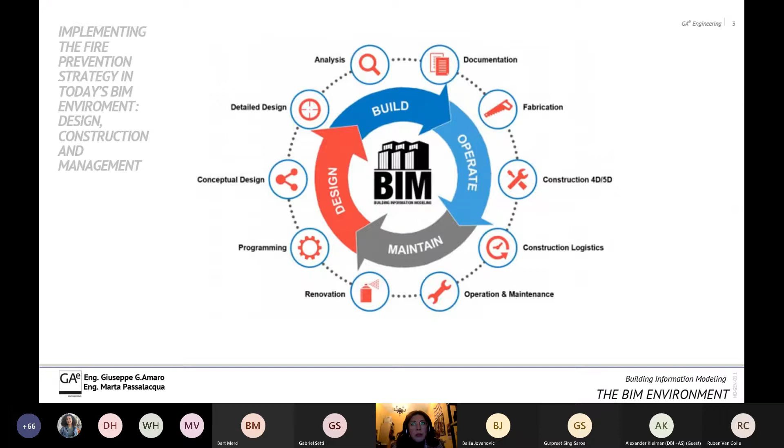BIM. BIM is an acronym of Building Information Modeling, and it is defined by NIBS as the digital representation of physical and functional characteristics of an object. This is an operating methodology based on the creation of a single digital model in which all information relating to the building is centralized, leading from design to maintenance.

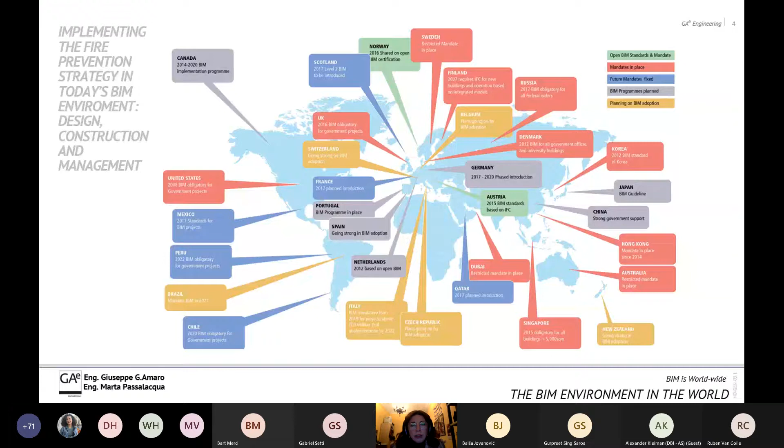Development of standards and adoption of BIM has progressed at different speeds in different countries. The introduction and adoption of this methodology has evolved rapidly in Italy over the last 10 years, beginning in the context of design and construction, and now found also in the administrative review and approval of projects.

In fact, in 2014, the new directive of the EU pushes member states to encourage, specify, or impose the BIM methodology as a reference standard for all publicly funded projects. In Italy, the mandatory nature of BIM took place gradually with the application of Ministerial Decree 560 in 2017. In Italy, we call it the BIM Decree.

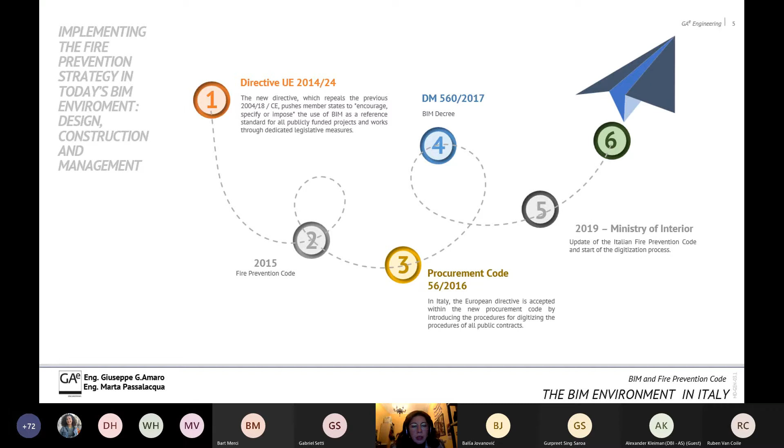On the other hand, the Italian Fire Prevention Code was published in 2015 in first revision, and then published in second revision in 2019. Before the Italian Fire Prevention Code, we used the prescriptive method.

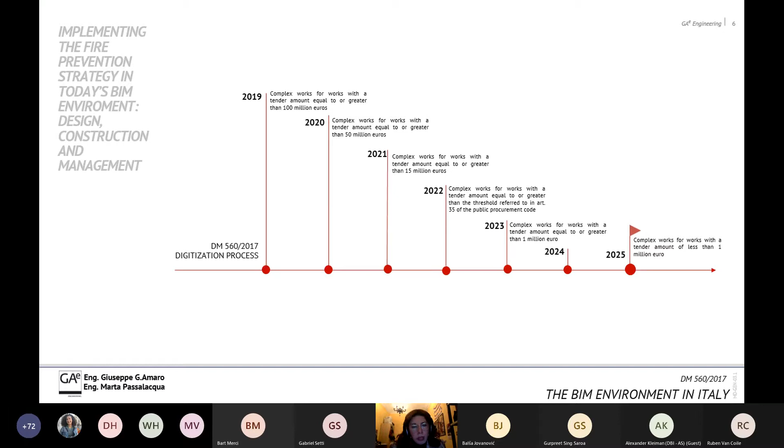The BIM methodology places its heart in the 'I' of information. In fact, the set of information and geometric characteristics make a BIM object.

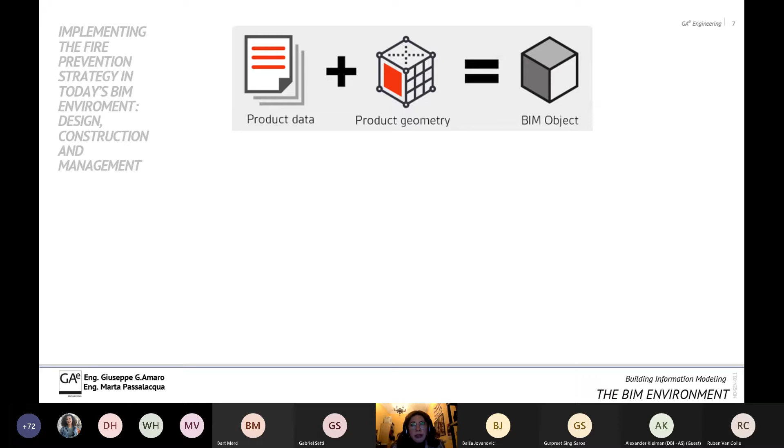In the BIM process, information is already collected from the design stage, and it is very important to have a uniqueness of data, and for that it is necessary to have open format files. In BIM language, this translates to IFC.

IFC is an acronym for Industry Foundation Classes. You can imagine this format like PDF. For example, if I write a text document and I use Microsoft Word, and you usually use LaTeX, you can read my text file if I export it as a PDF, so you can read my file.

The same thing happens in BIM. If I make a model with, for example, Autodesk Revit, and you use, for example, ArchiCAD, you can read my model with this open format file. It is created to facilitate interoperability between the various operators.

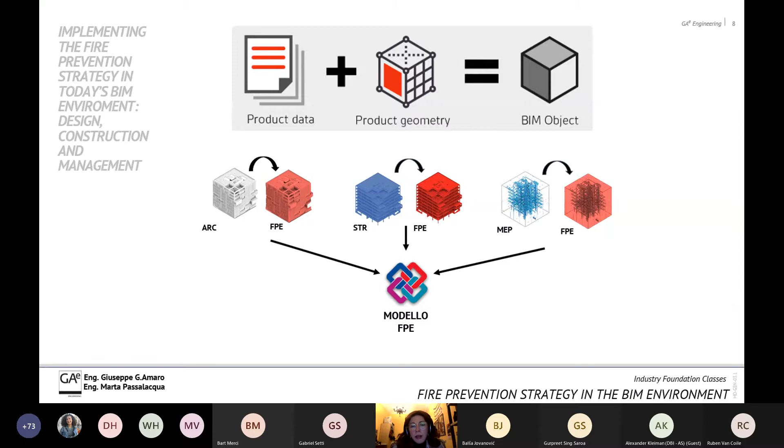In fact, normally architectural and structural teams use different software. For example, the architectural team uses Autodesk Revit, and the structural team uses Tekla. With an IFC file, everyone can read the models. I'll show you the difference between

the traditional method with CAD and the digital method with BIM. The first difference is about documentation. In the first case, usually we have a lot of paper documentation or digital documentation, but we have a lot of graphic sheets or technical reports.

In BIM, we have a single digital model, but it isn't really single - you have a federated model with whole models from every design team. For example, maybe you could have 2 models from architectural, 1 model from structural, and 3 models from mechanical, electrical, and plumbing teams, and another model from the fire safety team.

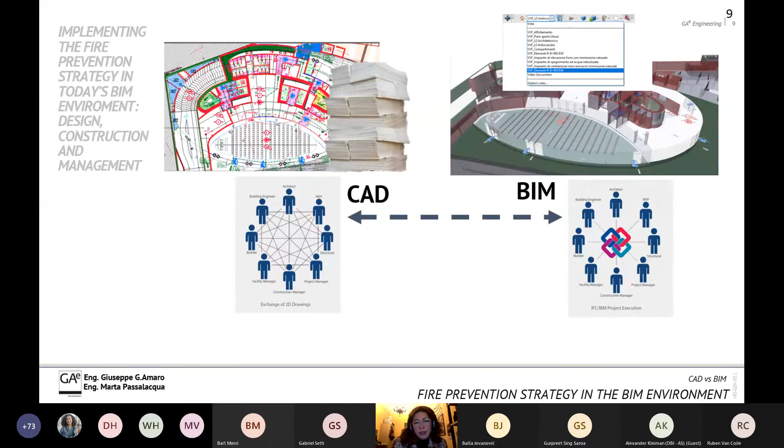The most important difference is about collaboration. In the first case, in fact, the collaboration is very chaotic. In the second case, the collaboration is a very important aspect of BIM.

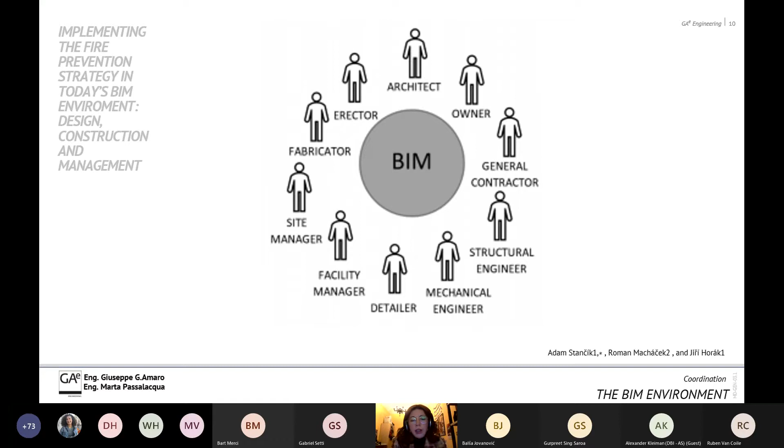In this slide, I show you an image taken from an article using a BIM model for fire emergency evacuation plan. As you can see, we have many professional figures like architect, general contractor, structural engineer, mechanical engineer, facility manager, etc. But one is missing - this missing figure is the fire engineer, and this figure is very important because it plays a transversal role through all disciplines in all phases of the project.

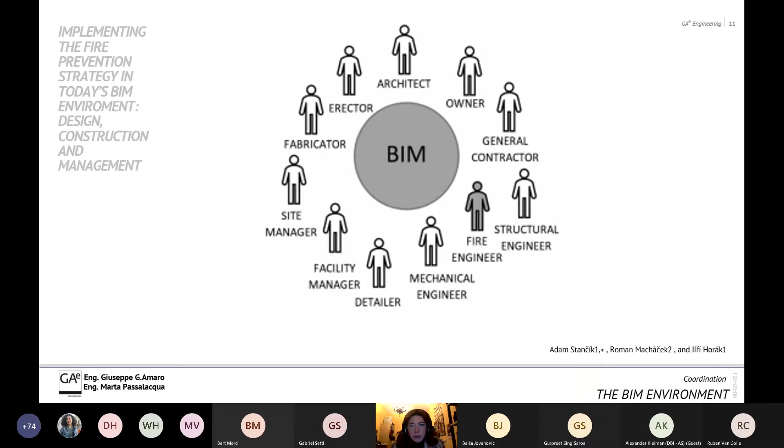I talk about the Italian Fire Prevention Code. It is divided into 4 parts. The first part is section G, general information. In this part you can find terms, definitions, fire safety design, and a segment of risk profiles for activities.

In section S, fire safety strategy, you can find all the measures used to design a fire safety strategy, like reaction to fire, fire resistance, compartmentation, evacuation, etc.

Section V is vertical technical rules. This section is for some subject activities. In Italy, we have 9 vertical technical rules, like offices, parking, schools, shopping activities.

And the last section is section M. In this section, you can find the methodology for fire safety engineering with 5 scenarios. Maybe I passed in the chat the URL of the English version of the Italian Fire Prevention Code.

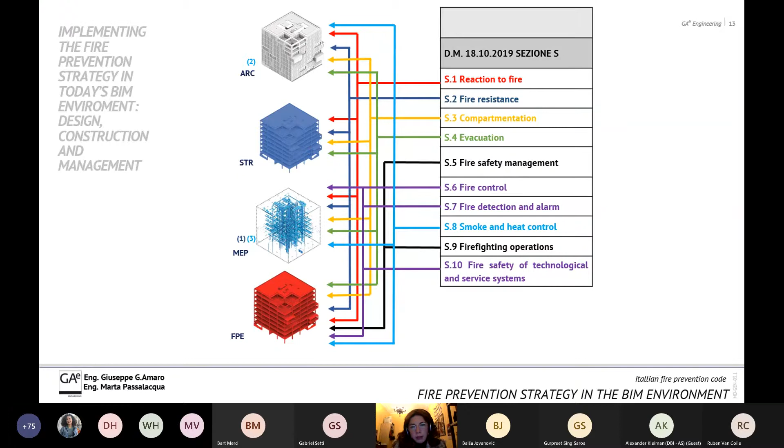There are many projects that we involved in BIM. For example, we used BIM to manage big events like Carnival of Venice or events in Turin. We used BIM to manage spaces in Roma Termini Station or manage the National Cinema Museum in Turin. For others, we developed the fire prevention model.

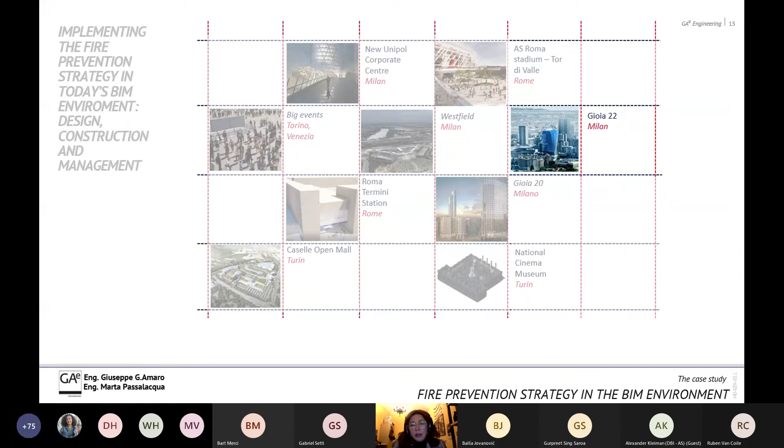The project selected for this presentation is Gioia 22 in Milan. It is a new high rise in Porta Nuova Garibaldi. The building is comprised of 22 levels above grade dedicated primarily to offices, and four underground parking levels that include technical and storage rooms. At the ground floor, there are commercial spaces that are completely independent from the office activities.

In the first phase, the design phase, we made 2 models. The first model is a masses model. We can say that model is a section G model.

Every subject activity was modeled by mass. In this slide, you can see the subject activities present, like the 4 underground parking levels, the commercial spaces, the office levels, and technical spaces at levels 23 and 24.

In the project information sheet, in the proprietary software, in this case Autodesk Revit, you can find the same parameters like building name, the author, activity manager, fire safety professional, main fire use. 73C in Italy are the offices, and ancillary fire use are the other subject activities.

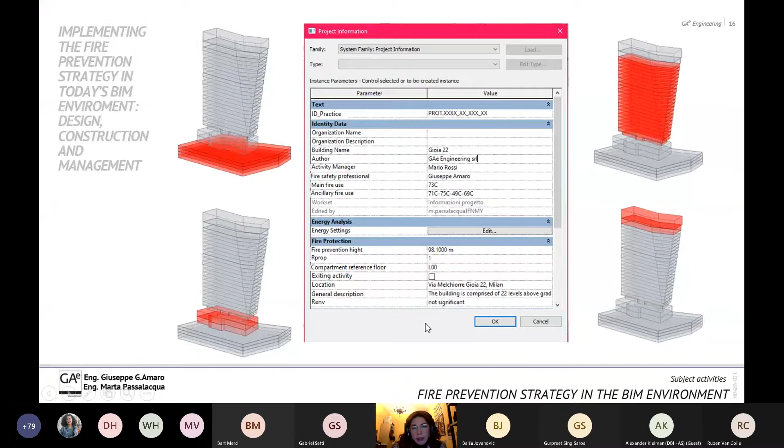We used computational design in Autodesk. We used Dynamo, and using this script to insert the parameters into the model. In this case, we use the script to insert life risk and delta alpha and delta occupant. These two parameters are necessary to calculate life risk.

Another script is to insert in the model, in this case into the subject activities, so in the masses, to insert all the measures about fire safety strategy, and we also insert the parameter about activities if the subject activity is main fire use. In this case, it's true because it is an office.

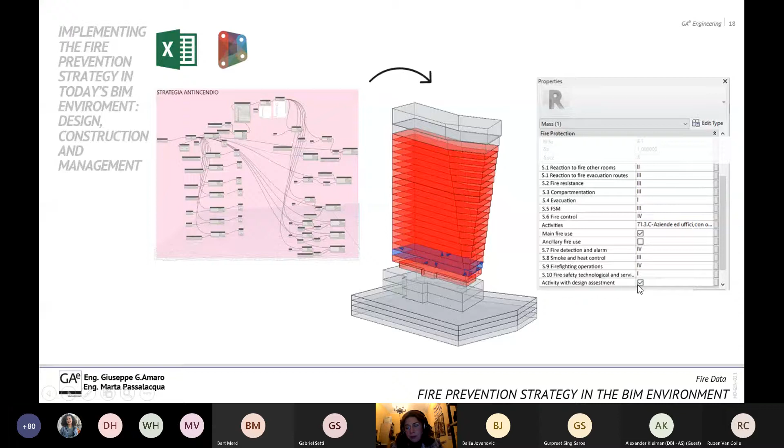And if the subject activity is an activity with design assessment, in this case it's true. The second model we made is a spaces and zone model. We can say that this model is a section S model, and the following slides refer to a typical floor of the building, in this case an office floor.

For fire resistance, we have two models to insert the parameters. In the design phase, in our model, the fire prevention model, we put the parameters into the zone, because the zone represents a fire compartment. In the architectural model or structural model, the parameters are inserted into walls and doors or columns.

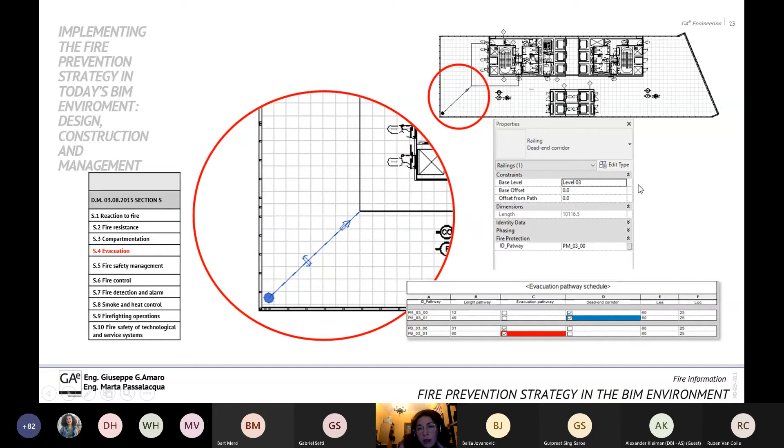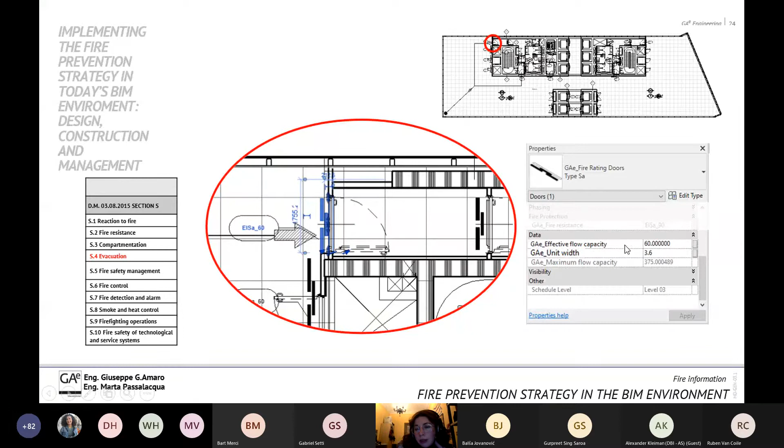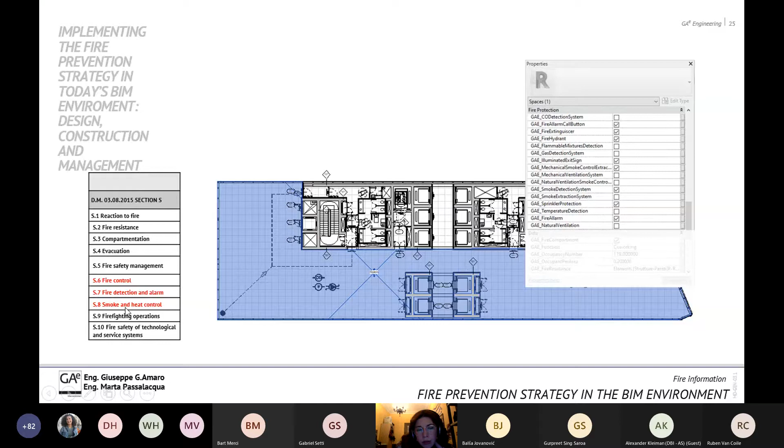In the symbol that we modeled of the doors, you can find other parameters related to Exodus. And in this slide, you can see the parameters associated to the spaces about fire control, fire detection and alarm, and smoke and heat control.

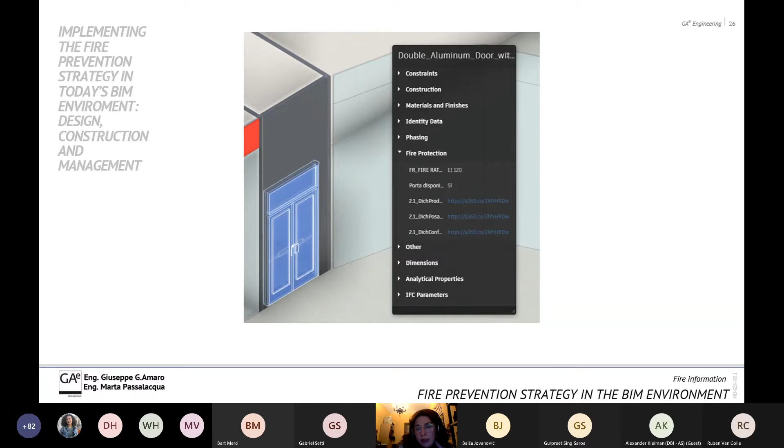The BIM model was also used to collect all documents to apply for the occupancy permit. In this slide, you can see the model inside the CDE. In this case, it is BIM 360. And if you select a door, for example, you can find the parameters.

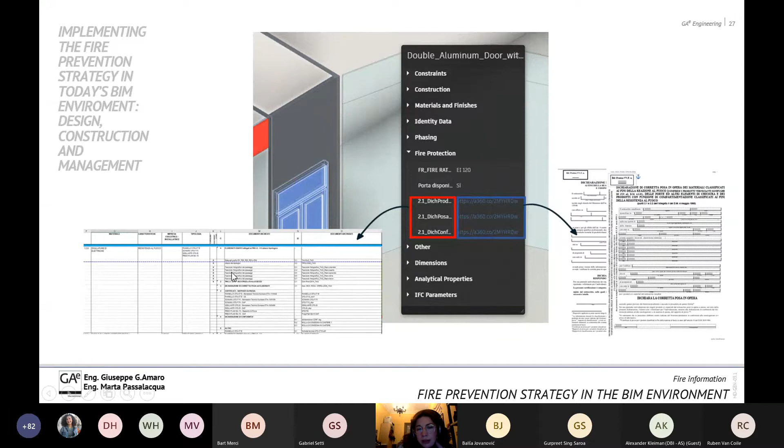And if you select the value of the parameters, you can open the documents. This is our Excel sheet that we use for the management of all documents.

Rapidly, I talk about the IFC model. When you export from Revit an IFC model, it is very necessary to define the property sets.

To manage this model, especially for fire administrative purposes, we decided to define property sets like VVF underscore activities or VVF underscore parties involved. So I show you three examples for three property sets.

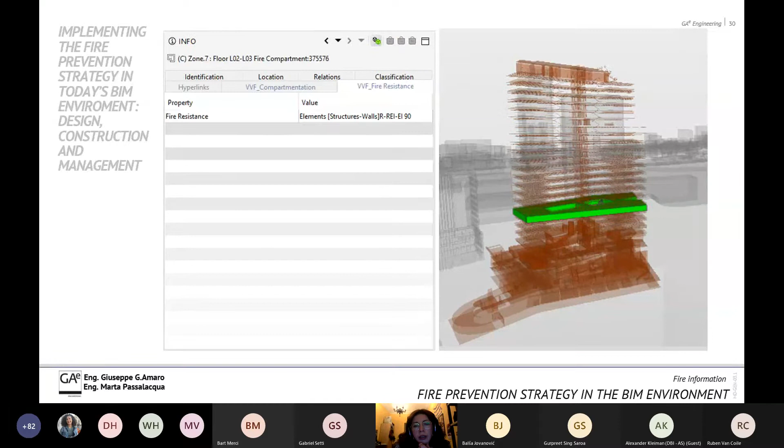The first one is VVF underscore reaction to fire, if you select a space, or fire resistance, if you select a zone, and fire compartment if you select a zone. Four examples, sorry. And the last one is VVF underscore fire control.

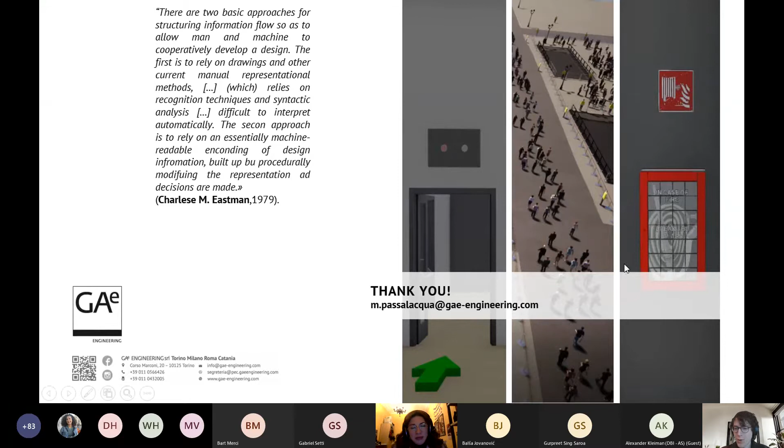The question was asking if it is foreseen that this directive, 2014-24, will become a regulation in the near future. Yes, in Europe. In Italy, we have a ministerial decree 560. The directive is for all states of Europe. Every state, I imagine, has a specific technical decree.

Okay. And I assume that Daniel O'Dowd wants to ask a question. In that case, Daniel, I invite you to unmute your microphone.

Thank you. Okay, so it's kind of a two-part question. The first part is, do you have to make these models yourself? And the second part is, if not, how is it that you got this information into the other discipline models? Like, how did you get the information into the architecture model and the structure model, for example?

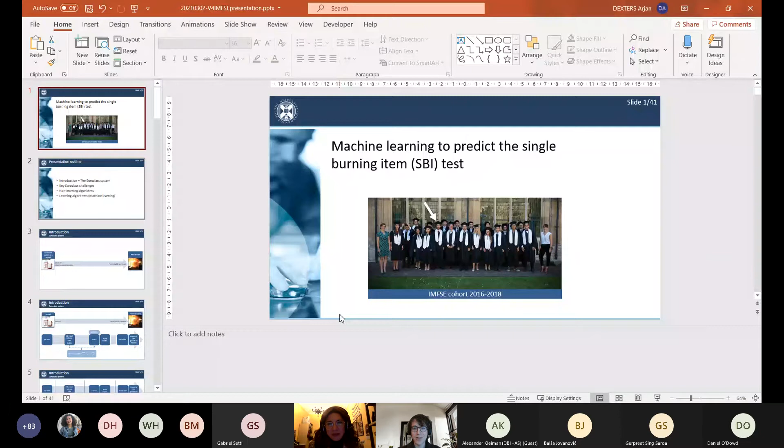Bye. Okay. Hi there, everyone. Can you hear and see me? Yes. All right. So I am Arjan. I graduated from IMFSE in 2018, and currently I'm doing a PhD at the University of Edinburgh. Today I'm going to talk a bit about machine learning and how to use machine learning to predict the single burning item test.

The presentation outline will first give some introduction about the Euroclass system, and we'll outline some key Euroclass challenges and look at how non-learning algorithms tackle these challenges, and then we'll see how learning algorithms tackle these challenges.

So first things first, what is the Euroclass system? The Euroclass system is actually a model that predicts the fire behavior of construction products in the real world. The Euroclass system is based on the SBI test and some other small-scale tests. And the real-world scenario to be modeled is fire growth in a room.

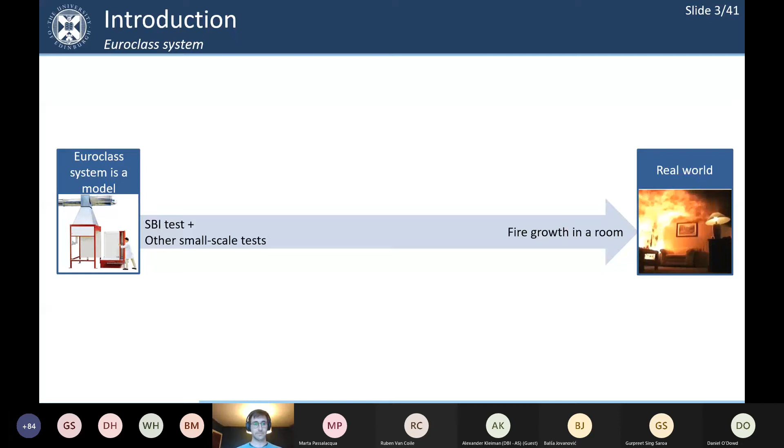Because the SBI test is the most important test, the remainder of the presentation will focus on the SBI test and not on the small-scale test. So let's see how this works to go from the SBI test to the real-world scenario.

So at first, the SBI test is done, and then from the SBI test, we get the SBI heat release rate. The SBI heat release rate can then be converted into a so-called FIGRA value, and to do that, you use the equation at the bottom of the screen.

The equation actually states that the heat release rate value at every time step measured in the SBI test, you divide it by the time that it occurs. And the 1000 is there to go from kilowatts to watts.

Once you have transferred your heat release rate curve to a FIGRA curve, you can then track the maximum FIGRA value, which you can find in the Euroclass table. And then once you have the Euroclass, you can also find the predicted contribution to fire growth in a room.

Now, I should say here that the FIGRA is not the only classification parameter. There is also the total heat release rate. But for the data I'm using, the total heat release rate didn't pose any other boundaries than the FIGRA, so the remainder of the presentation will be directed at the FIGRA value.

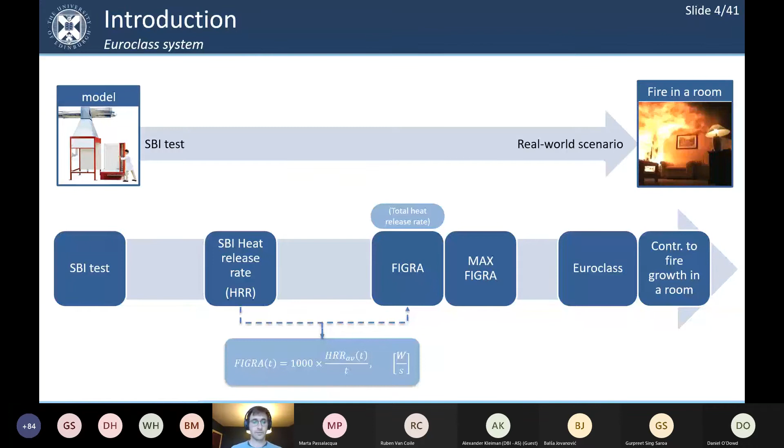A bit more visual, it looks like this. So on the left-hand side, we have the SBI test in action. Then we get the heat release rate curve. The heat release rate curve is transformed to a FIGRA curve. For this material here, we can see that the maximum FIGRA is 450 watts per second.

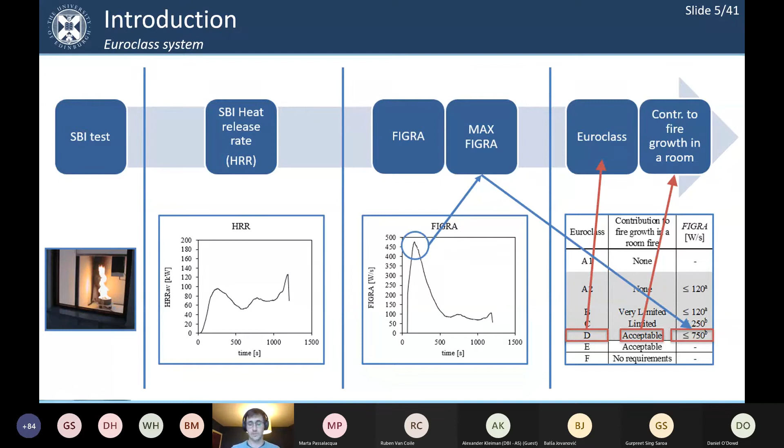So then we can go to the table. We can see that this value falls between 750 and 250, so that's Euroclass D. And then Euroclass D signifies a predicted contribution to fire growth in a room, which is acceptable. So there are a few challenges to this system, and let's look at them now.

The first challenge is the physical size of the SBI test. The SBI test is much bigger than some bench scale tests like the cone calorimeter. The cone calorimeter, for example, needs a sample with an exposed area of 0.00884 square meters, whereas the SBI test needs a sample with an exposed area of 2.24 square meters. So approximately the sample size in the SBI test is 200 times bigger than the sample size in the cone calorimeter test, and this makes the SBI test relatively time consuming and expensive.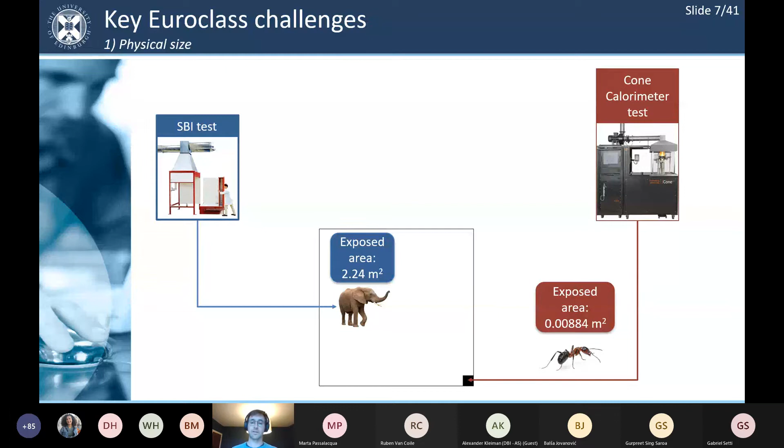The second challenge is that the Euroclass system often neglects the second half of the test. So on the left-hand side, we have a graph which shows the heat release rate for MDF. It can be seen that the heat release rate at 500 seconds is 60 kilowatts. At 1000 seconds, the heat release rate is approximately 120 kilowatts, so 2 times bigger than at 500 seconds.

But if we then look at the FIGRA graph for the same material, we see that the FIGRA at 500 and 1000 seconds is the same. This is because the heat release rate gets divided by the time, and thus the farther the test advances, the less significant heat release rate values become for the FIGRA.

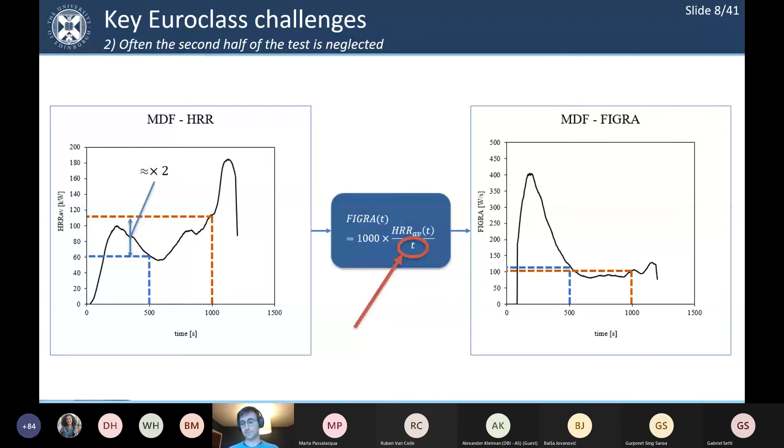The third challenge is experimental variation. So the top 2 graphs show the heat release rate and the FIGRA on MDF for 2 different SBI tests. On the FIGRA graph, it can be seen that there are 2 different maximum FIGRA values for each test, but for MDF it doesn't really matter because both of them fall within the class limits for Euroclass D.

It gets more interesting when we look at, for instance, phenolic foam. For phenolic foam, the 2 SBI tests result in maximum FIGRA values that each result in a different Euroclass. So one test is classified as Euroclass C, and the other test is classified as Euroclass A2 to B.

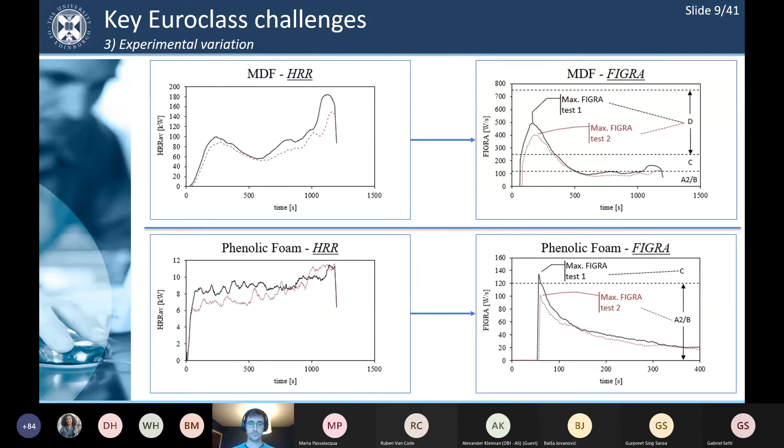The spread becomes more visible the more tests we do. The graph here shows the experimental heat release rate of 45 different SBI tests on medium density fiberboard. It can be seen that the gap between the 95th percentile lines for the first heat release rate peak is 60 kilowatts, and for the second heat release rate peak is 120 kilowatts.

I should note here that it's not the experimental variability itself that is a problem, because that's inherent to fire testing. The issue is more how we communicate the variability to the end user, or the question that needs to be asked is whether it makes sense to grant one class to a material that shows a large experimental variation.

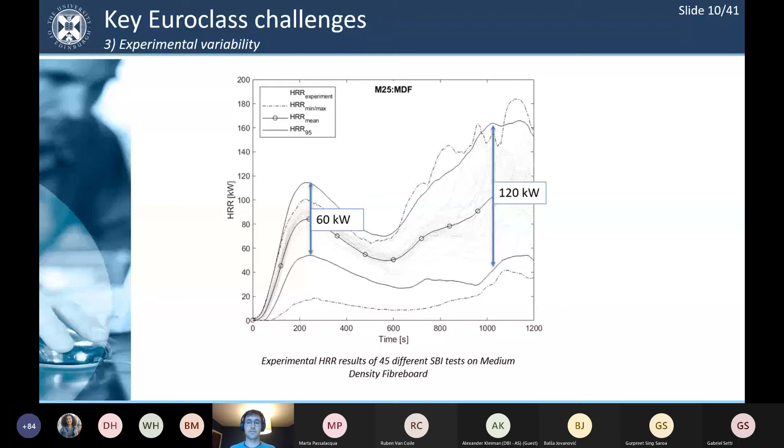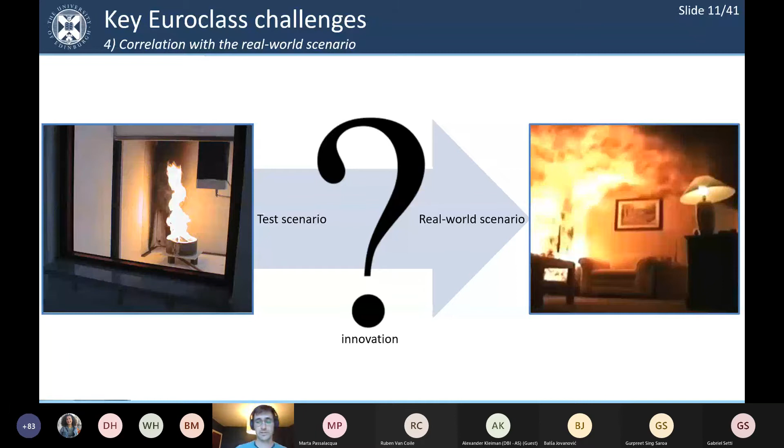The fourth challenge is whether the correlation with the real-world scenario is correct. That is especially relevant for any innovative materials marketed after 2002, when the SBI test became the backbone of the Euroclass system. So why are these challenges important?

Why do these challenges matter to us? The physical size of the SBI test makes it inefficient for product development, and this is especially relevant for the product developer. The fact that the SBI test often neglects the second half of the heat release rate data...

...that there is experimental variation that can result in multiple Euro classes for one material, and that we are not sure whether the SBI test correlates to fire growth in a room as outlined, means that a Euro class on its own does not give the necessary information to make a satisfactory fire safety design. This is especially relevant for the fire safety engineer.

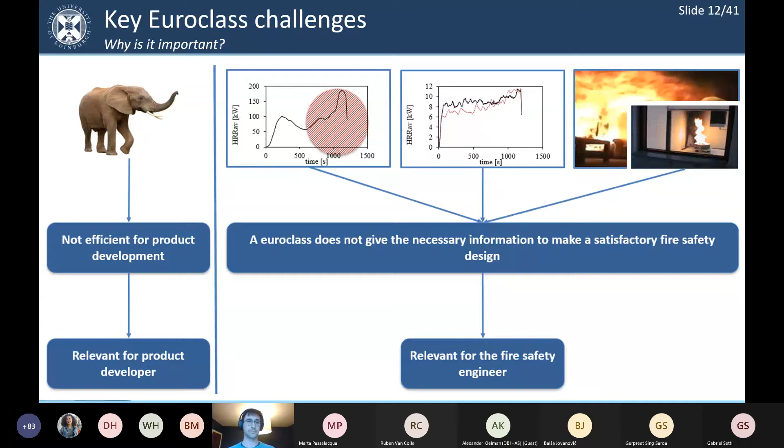A possible solution for the product developer is to make a screening algorithm based on small-scale tests. That way, the product developer can test product changes using the screening algorithm. Once the screening algorithm predicts the outcome he wants, he can go on to do the SBI test as validation. The solution for the fire safety designer is a more detailed ranking system.

The ranking system proposed is a probabilistic ranking system. So we're not going to give one Euro class for a material, but instead state the probability of each Euro class for that material. If the screening algorithm can make these probabilistic predictions, the output can be used both by the product developer and as input to the new ranking system. So what will the output of such a screening algorithm look like?

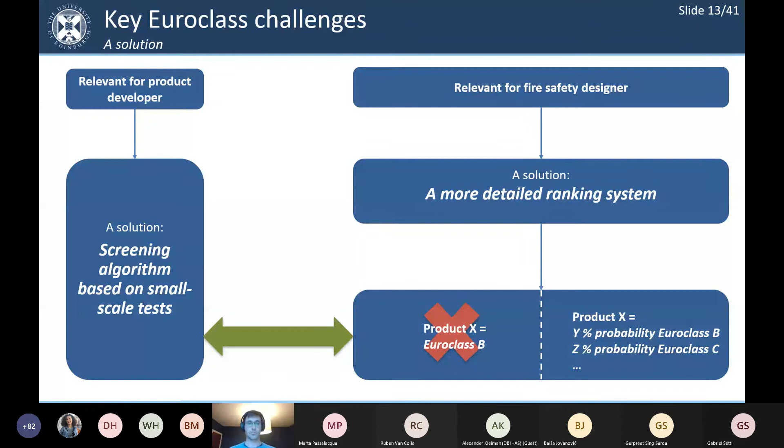In the current Euroclass system, both these products will be classified as Euroclass B, so no distinction will be made. But clearly the materials are different, and material 1 might be more suited for a more critical design, while material 2 can also be used for a less critical design.

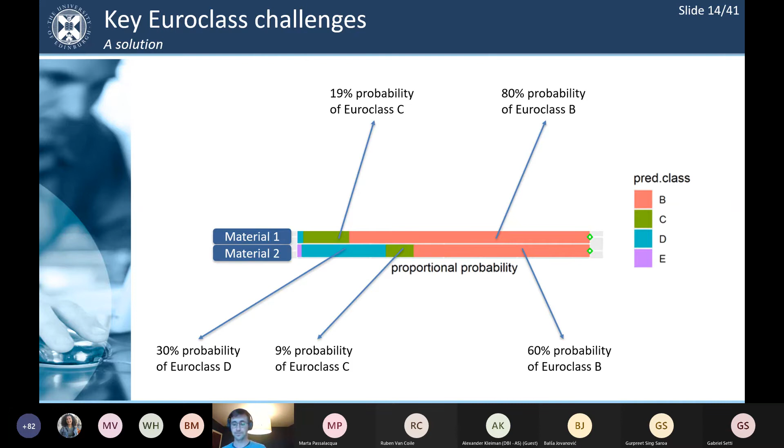So at this moment, we know what the Euroclass system is. We know some challenges of the current system, why these challenges matter to us, and why they are important. We also know what a possible solution can be. So let's have a look now at how machine learning can achieve this solution.

The problem here is that there is no feedback loop between the fixed correlation and the input and output, which means that whenever a new and innovative material comes on the market, the researcher has to work very hard again to update the fixed correlation. This takes a lot of time, and that's why often the fixed correlation doesn't get updated, and therefore it gets outdated very fast.

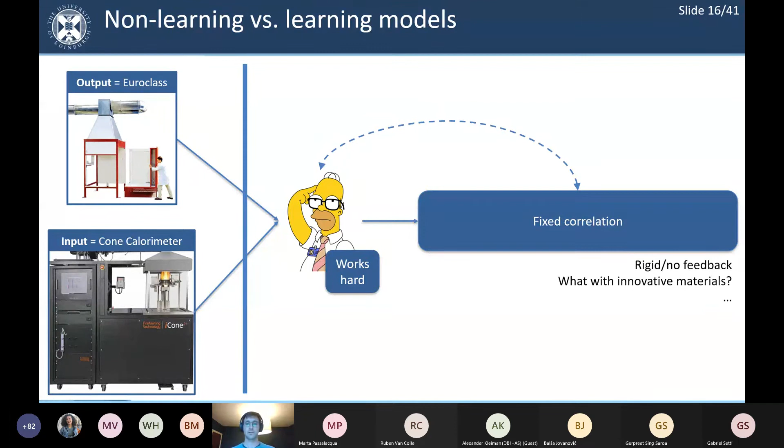The machine learning algorithm turns this around. For a machine learning algorithm, the researcher works a bit and makes a very simple algorithm. Then the input and output are given to the algorithm, which works very hard and comes up with a quite complex correlation, one that is in constant communication with the input and output.

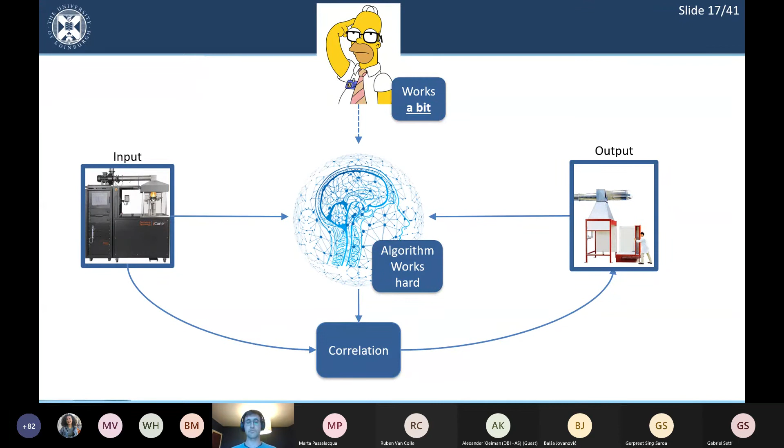So what does that look like? If a new material comes to the market, the new input and new output can be given to the algorithm alongside the old input and old output. Then the algorithm works very hard again and updates its correlation without interference, or with very little interference, from the machine learning expert.

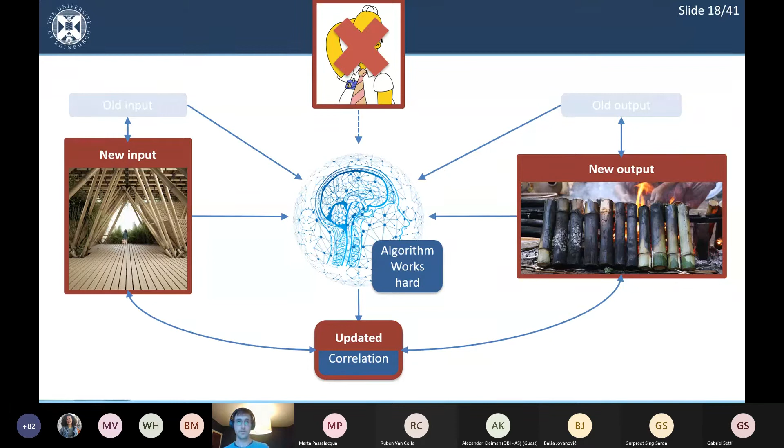Now we know that machine learning has some big benefits over non-learning algorithms. Let's look at how we can make such a machine learning algorithm. The goal for the machine learning algorithm I'm presenting today is that the input has to be from the cone calorimeter, the output is a probabilistic Euro class, the accuracy is similar to current screening models, and the algorithm has to be flexible.

The first step is that you need to source data. So the data I have consists of the materials of the 1997 round robin study. And for each of those materials, I have 5 cone calorimeter tests. So in total, I have 150 cone calorimeter tests.

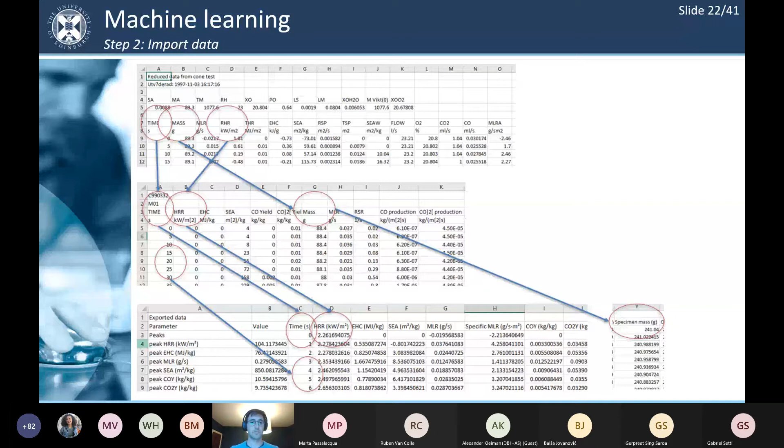But once you have the data in your algorithm, you can define some high-level features or input parameters. The cone calorimeter parameters I have chosen are the total heat release rate, the time to ignition, the maximum heat release rate, the time at which the maximum heat release rate occurs, the heat release rate after 300 seconds, the total mass lost, and the cone calorimeter FIGRA. Besides the cone calorimeter parameters, I also have some material specifications like the thickness, the density, the effective density, which actually is the density of the exposed 1 centimeter of the material, and the effective heat of combustion.

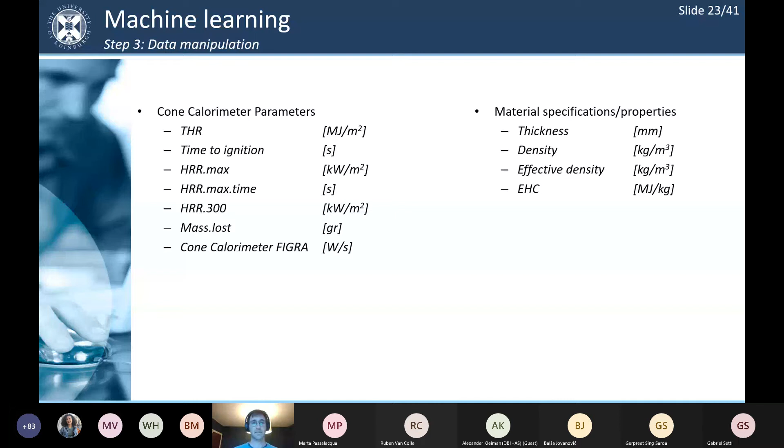The next step then is to split your data set. So the first split you do is into a training set and a test set. Often it's a 60%, 40% split, but you can use whatever works for you and whatever gives the best results.

The training set then is split another time into a training set B and a cross-validation set. The idea here is that you train a lot of different models on training set B. Then with each of those models, you make a prediction on the cross-validation set, and you can compare the accuracy on the cross-validation set. You select the best model, and with that model, you make predictions on the test set. The accuracy on the test set will be the best approximation of how the model will perform in the future. The reason for having a separate test set is because the performance on the cross-validation set is a bit biased, since you use it to select the best model. So the model has already seen this data, while the test set is truly unseen.

The first model I made was a binary model. This model uses only material specification inputs, like the thickness, the density, effective density, and effective heat of combustion. The idea behind this model was that if I can make a model that doesn't require any input from any fire labs, then it can be truly used by the product developer.

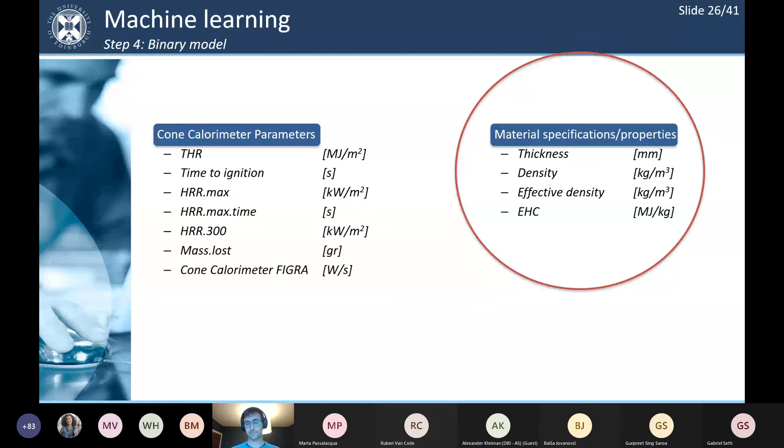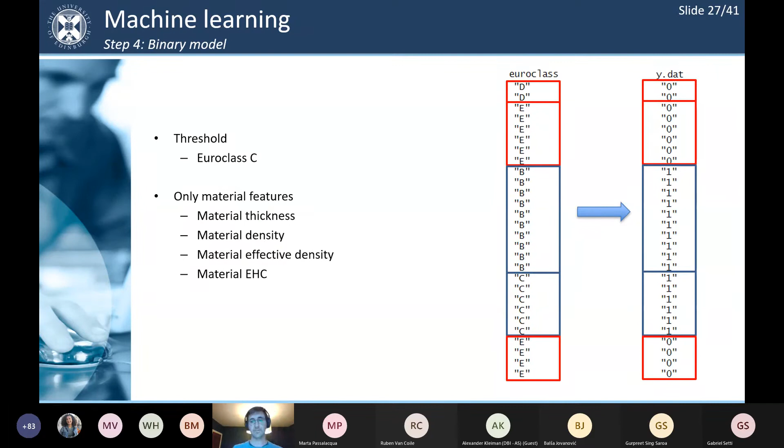But then the problem is that the parameter selected by the model is just that parameter that cannot be determined without interference of fire labs. So the original idea was not achieved. But still, starting with just a simple model is very useful because you can check if your coding is working properly and if the output makes sense. So at least now we know that the coding was done properly and the output makes sense.

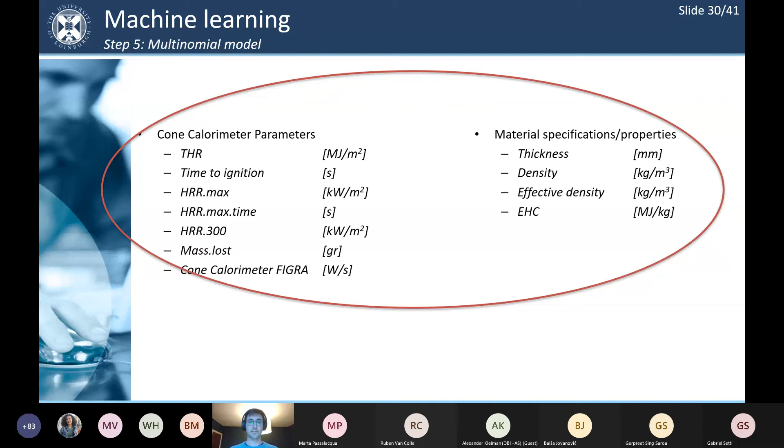The next step was then to make a multinomial model. The multinomial model uses all the features and predicts the Euroclass directly, so the output is going to be Euroclass A2, B, C, and so on. The model then told me that only time to ignition was not related to the output, which is quite surprising, because most non-learning algorithms available today are based on the time to ignition.

When you look at existing models, the time to ignition they use is determined in different ways. Some people say it's when the heat release rate in the cone reaches 25 kilowatts, others say it's 50 kilowatts. So they're not really using it as a physical parameter anymore, more as a parameter that fine-tunes their algorithm. It was nice to see my model picked up on this, and the average test set error with this model was 10%, which was very good. I was very happy with that.

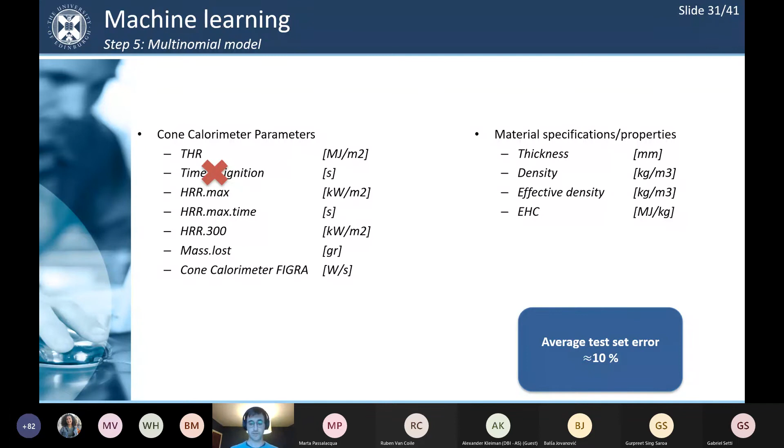So at this moment, we have a machine learning model that takes input from the cone. The output is probabilistic, and it has a similar accuracy as current screening models, but we haven't yet shown the flexibility of these algorithms. So let's have a look at that.

And I lied a bit to you, because I have a validation set, but I also have a test set. Why did I do this? It's because the validation set isn't really truly unseen, because sometimes you look at it and make small adjustments to your model and then look again. But the test set is something you keep far away in your computer, and only use once your model is completely finished. You run it once, and then you have the true performance you can expect later on.

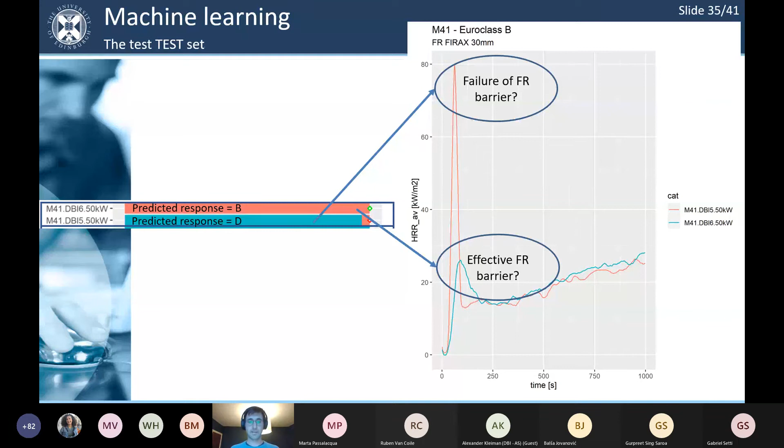So let's look at what the problem is here. This is the input from the fire retardant FIRAX, 30 millimeter, two different cone tests. For the red curve, the model predicts Euroclass D, and for the blue curve, the model predicts Euroclass B. If you look at the data given to the model, it's actually correct that it makes this distinction, because it interprets the heat release rate peak of the red curve maybe as a failure of the fire retardant barrier or something else. At least it's telling me something is off with this product. So given the data, the model is actually doing a good job.

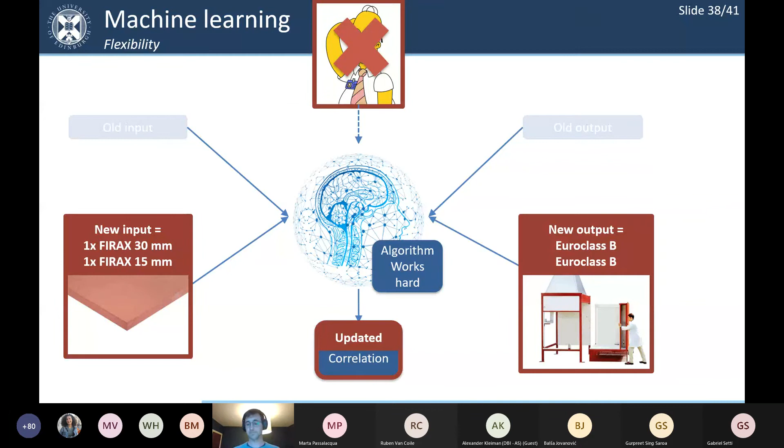If we then look at the right-hand figure, we can see that after retraining, the algorithm actually predicts all 4 of the bottom ones right. So now it's predicting a Euroclass B for these 4 materials, and actually it gets the whole test set right. So the test set error is 0% at this moment.

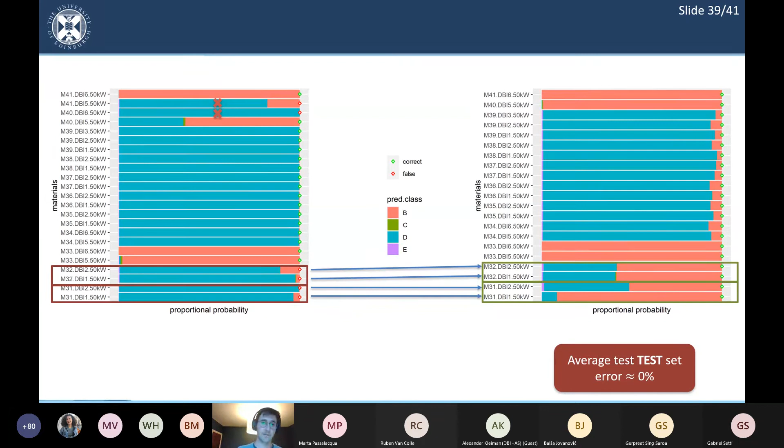So at this moment, we have a model which takes input from the cone calorimeter. The output is a probabilistic Euroclass. The accuracy is similar to current screening models. And we have proven that the model is flexible.

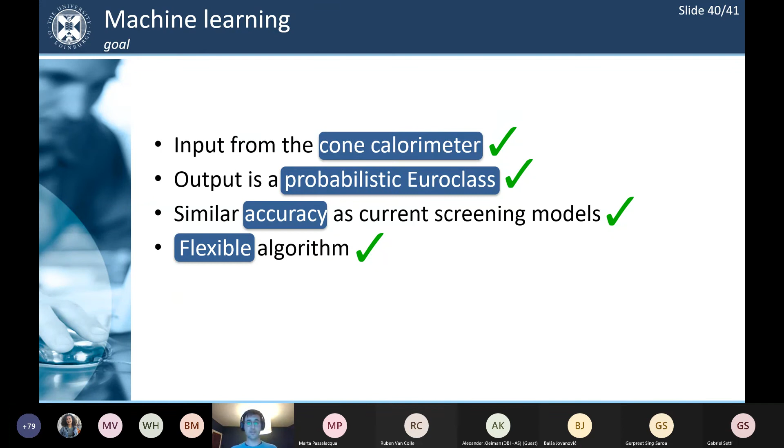And this last point is what really distinguishes machine learning from current non-learning models: it can retrain itself very fast and very easily. And I think that's necessary in fire safety science, where we're constantly confronted with innovation. Any algorithm that cannot learn will become outdated quite fast.